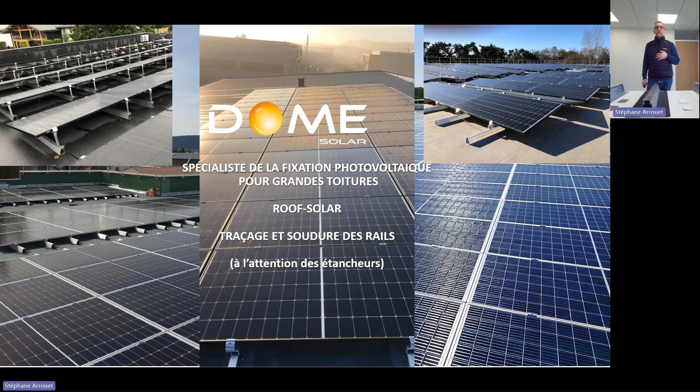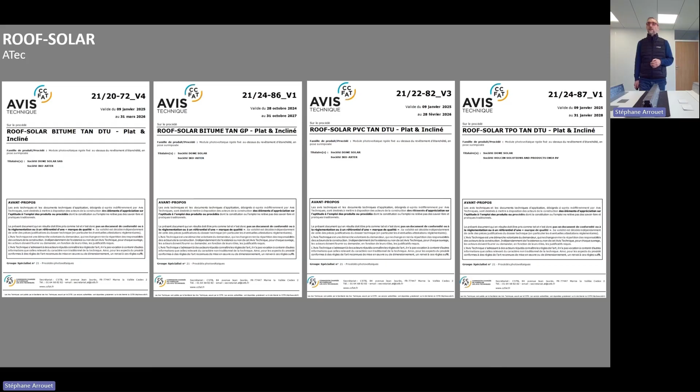Feel free to visit our website to download the technical reports. You may already notice that we are on V4, so version 4 of the roof solar bitumen, and PVC V3. This is with our partner IKO Axter. With our partner Holcim, formerly Firestone, we are at V1. Also on our website, you will find the installation manuals. These two are regularly updated.

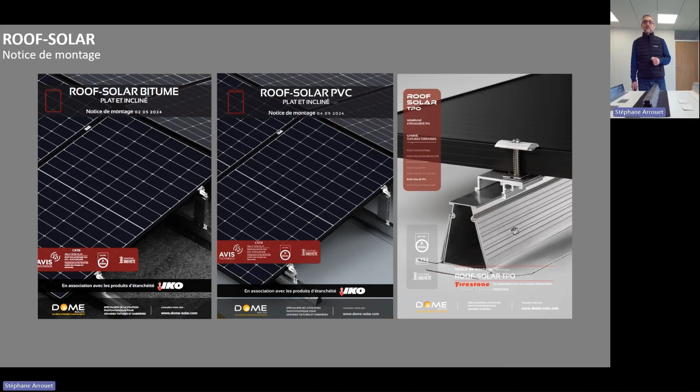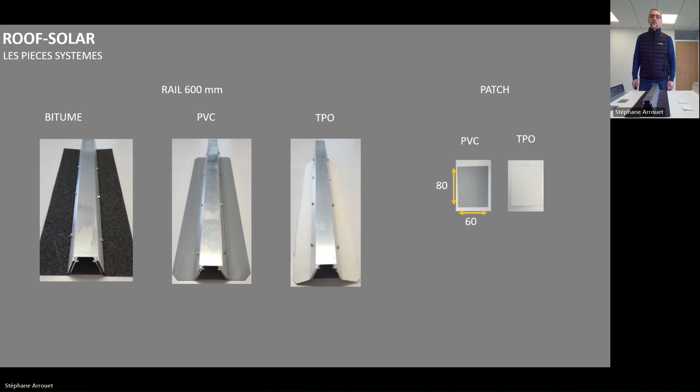Before we delve into the important aspects of layout and the crucial process of welding, I will first introduce and explain the specific parts that are of particular concern to you, especially in terms of ensuring optimal waterproofing, which primarily involves the critical welds themselves.

It doesn't matter. In the waterproofing system, you will always find the 60-centimeter rail here fitted with these TPO membranes, fitted with its roof solar bitumen membrane with flakes. And here the 60-centimeter rail fitted with PVC membranes.

And please do not forget that with both PVC and TPO roofing systems, we specifically provide you with durable PVC patches and robust TPO patches. These essential patches should always be carefully placed at the very ends of the rails to effectively prevent any potential puncturing or damage that could occur between the roofing membrane and the underlying rail structure.

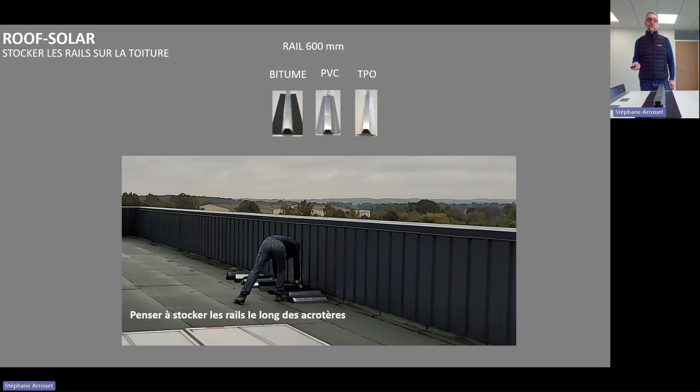Before you start marking out, you'll have a bit of handling to do, meaning you'll need to store the rails on the flat roof. What I recommend is to place them along the parapet walls, because there is an area where it is forbidden to install our rails. That's all around the parapets and within a distance of 1 meter from the parapet. You'll also find these same distance requirements around the skylight.

Dome Solar provides you with a plan featuring cumulative measurements, meaning there is a 0 point at certain locations and a measurement at each end of the rail.

In general, for marking out, I ask to have 4 people. And the following tools: a 50 or 20 meter tape measure, which you'll primarily use to accurately measure your roof, so it could be from one gutter to another, it could be between the ridge cap and the edge of the gutter. You might check your measurements in relation to the skylight, to the smoke vents. Also, what's even better is a chalk line with red ochre, as it allows the markings to remain visible from one day to the next. You never know, at night the humidity could erase it if you use blue chalk line.

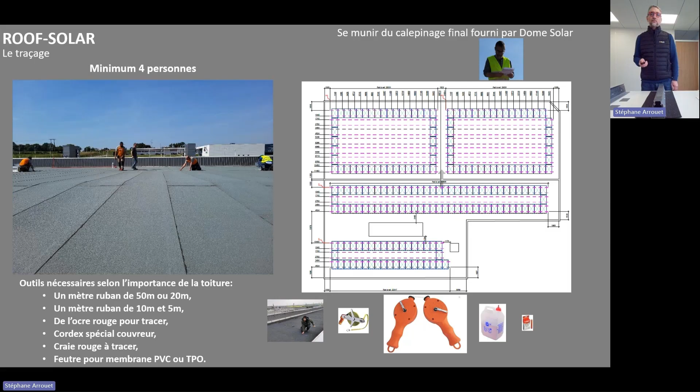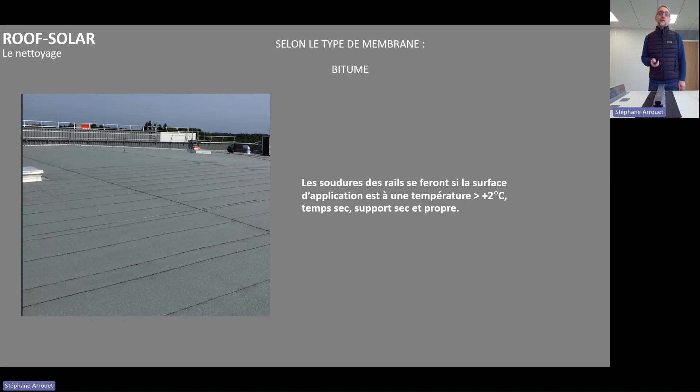Make absolutely certain that you have chalk or a suitable pastel to write clearly on the bitumen surface, specifically a vibrant red pastel, or alternatively specialized markers designed for use on PVC and TPO materials. Of course, whether for marking or welding, the membrane needs to be clean. So for applying bitumen, you absolutely need an outdoor temperature that is above 2 degrees Celsius, along with completely dry weather conditions and a thoroughly clean surface area.

For PVC, it can happen that it's soaked PVC or TPO, and of course you'll need to remove any excess water. You might even need to clean it thoroughly with plenty of water. And then if that's still not enough, you'll have to apply a product, IKO Armourplan, at the locations of the welds and rails.

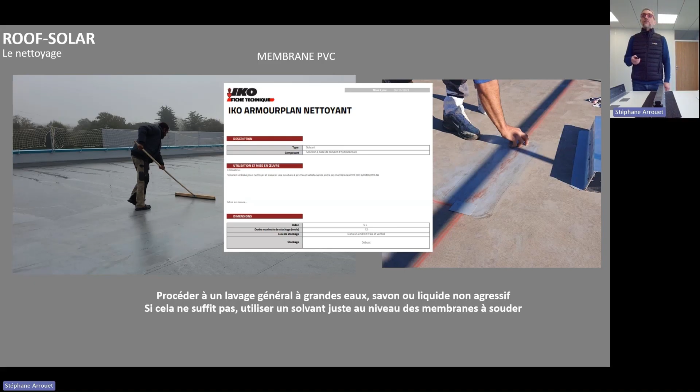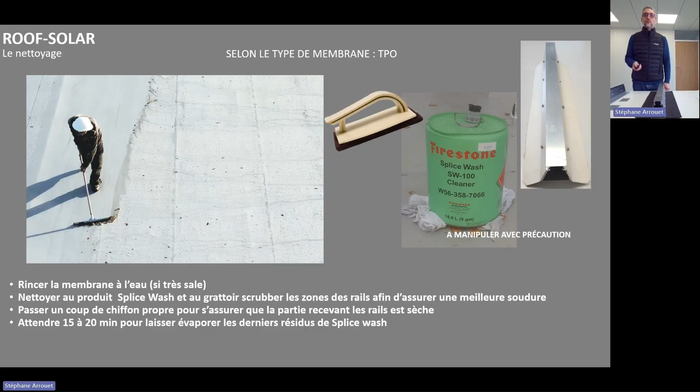You'll also find cleaning is necessary on the TPO membrane. And on the TPO membrane, in practice, you are required to apply a product, Firestone's Splice Wash, at the location of the rails. So same thing, when you apply the product, you have to wait for it to dry before welding.

As I mentioned at the beginning, there are measurements to check before starting. Why 4 people? Well, actually, it depends on the size of your project and the dimensions of your generator. But if you already have a distance of more than 15 meters from the first rail column to the last rail column, often just to hold your measuring tape, you need 2 people. For marking, you'll also need 2 people and 1 in the middle of the marking to keep your chalk line pressed against the ground. And 1 person will read the cumulative measurements and another will also mark on the ground.

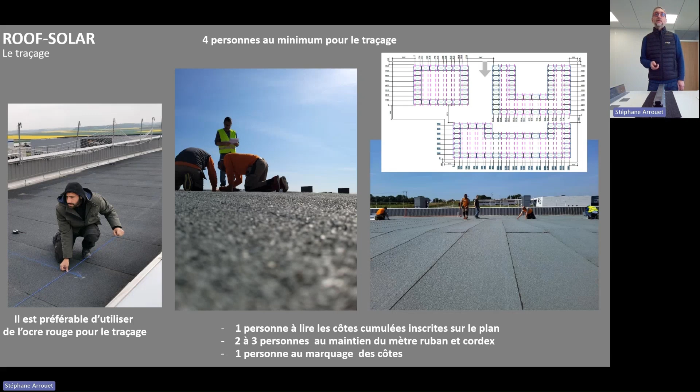The very first and most important thing to do is to carefully check the precise measurement in direct relation to the curb, ensuring accuracy, and you will mark your 0 point. There's a measurement that always comes up on our plans. It's the famous 1040 measurement. In fact, it's the 2 rails that are located under your module.

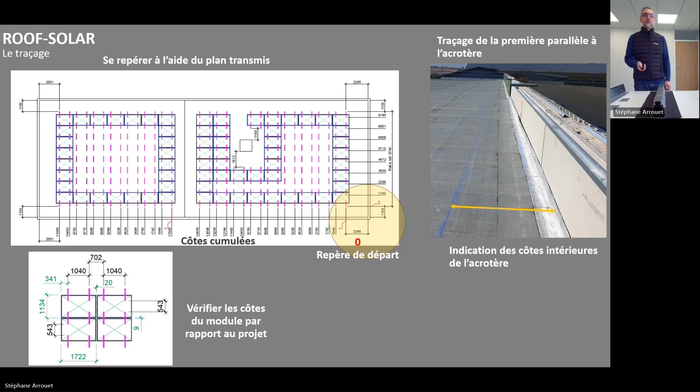These are measurements you need to check regularly when you're marking out. It's important to regularly check that both of your measurements are at 1040. Of course, the intermediate measurements between 2 1040 measurements, that is between 2 modules. But for you, the waterproofers, that's not your concern. Since you won't be handling the installation of the modules, there are still measurements to be respected, and these will change depending on the size of the module. So a measurement that comes up all the time on every plan is 1040.

We're going to draw a first parallel line on the longest side of the parapets. You should be at least 1 meter away from your parapet. Here, for example, we're about 1.13 meters away.

So you're going to take this first parallel, your 0 point, and we're going to go all the way around your generator, your area. And you stop right at the very last one, the final row of rails, meaning that you will have an outer measurement: the first one carefully marked in direct relation to the parapet, and the very last one, which is positioned inside your generator, providing a comprehensive and accurate measurement.

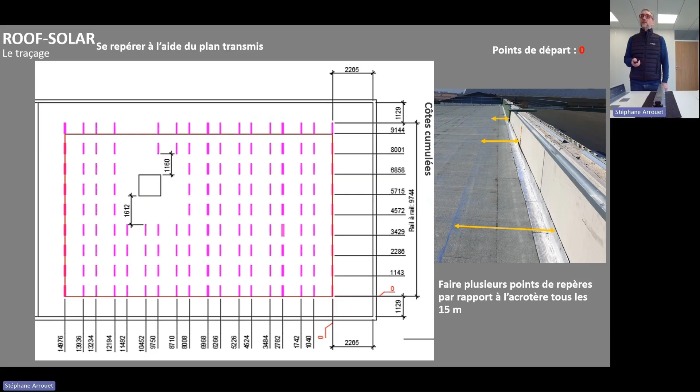So when you're marking with your chalk line, you need to take much larger measurements. Here is your generator. If we look at our measurement at 9.14 meters, that's the last line you drew. And you also have your rail, which is actually about 9.74 meters. Your generator is 9.74 meters. So don't hesitate when marking with the chalk line to go much further than the indicated measurements. It will help you when installing the rails.

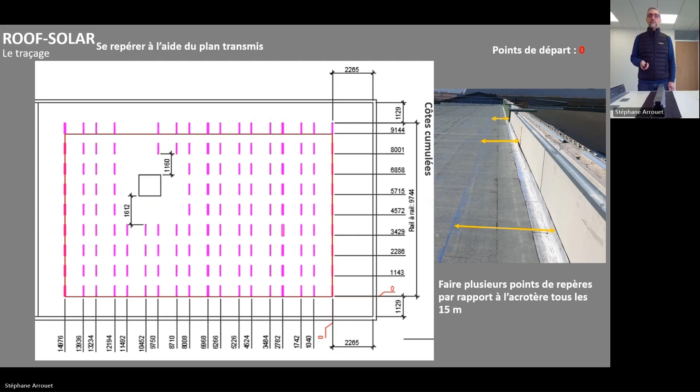So of course, when we start marking, we have a plan with the cumulative measurements, and on the roof, nothing has been marked yet. We start from our 0 point. And we draw our first parallel to the parapet.

And we're going to use the 3-4-5 method, which means a first measurement between 0 and your parallel at 3 meters, a distance of 3 meters, and a second measurement from your 0 point, but perpendicular to your first marking. You will draw an arc with a radius of 4 meters. Next, you will check your diagonal from your 3 meter marking and your 4 meter arc. At the intersection, you will have your 5 meters. And now you can draw your perpendicular to your first line.

You will do exactly the same on the opposite side, at 14.97 meters, a little further. You do between your 0 and your 14.97 meters, that's your last rail column. You mark your 3 meters in relation to your 14.97 meters. You draw your arc at 4 meters and your point at 14.97 meters. You check your diagonal between your 3-meter point and your 4-meter arc, and you draw your perpendicular.

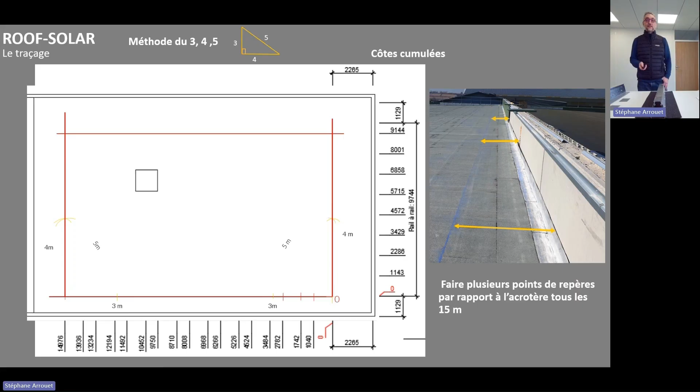That's when you have one person at the 0 point, another at 14.97 meters, one person marking according to the cumulative measurements, and another reading the cumulative measurements on the plan. Here, for marking the cumulative measurements, it's better to have 4 people. And you do the same thing on the opposite side, using the same cumulative distances.

Then, in the vertical direction, meaning along the rails, you just mark a point at one end of a rail. You don't mark both ends, just one end. And you do the exact same thing on the opposite side. Once you've marked everything, all that's left is to mark with the chalk line. For the chalk line, you can do it with 3 people: one at the 0 point, another at the end at 14 meters, always taking a bit longer, and one person in the middle.

We usually start vertically, so you'll have one person there. Make sure to take much more than 9.74 meters. Measure from rail to rail, from one rail end to the other, and don't hesitate to take a longer measurement. There's often someone in the middle who also presses down with the chalk line, stretches it, and above all, when you're marking, don't go beyond 15 meters. With the chalk line, just a little bit of wind is enough to throw you off course.

Once you've done the vertical direction, you do the perpendiculars, and again you need at least 3 people to mark the lines. Then once you've marked everything, you'll go back to the rails laid along the parapets. You'll need to bring them to each intersection of your markings: first column, second column, and so on.

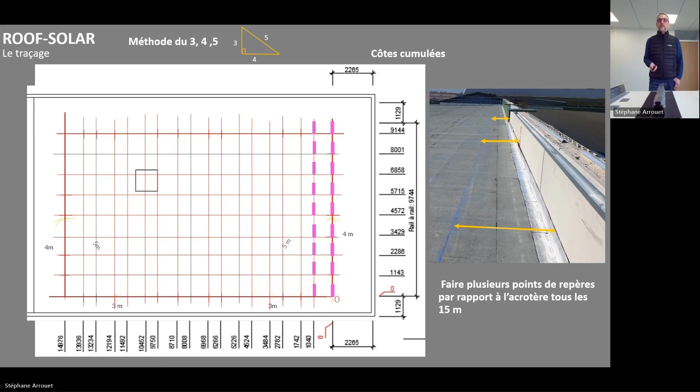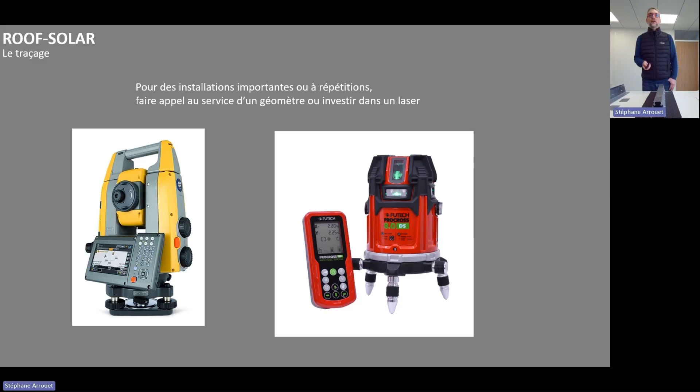For a project that's much larger than a 50 kilowatt or even a 100 kilowatt one, you might want to use a laser, or even call in a surveyor who will set out points. But even then, you'll still need to do the marking, though at least you'll have all the points set. And if you have a surveyor or a laser, it's doable by just one person.

Handling the rails in terms of time shouldn't be underestimated. For a 50 kilowatt job, you need at least half an hour, even with 3 people.

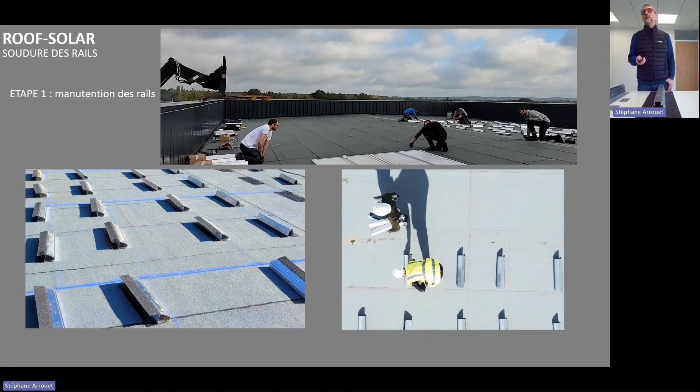In the photo here, you can see the marking, and once you move forward with the marking, what's interesting is that you can start welding. There's one team doing the marking and another team welding. There are 2 types of welding, PVC and TPO, and both are welded with hot air. You can also use a semi-automatic machine to help, or otherwise it's done manually.

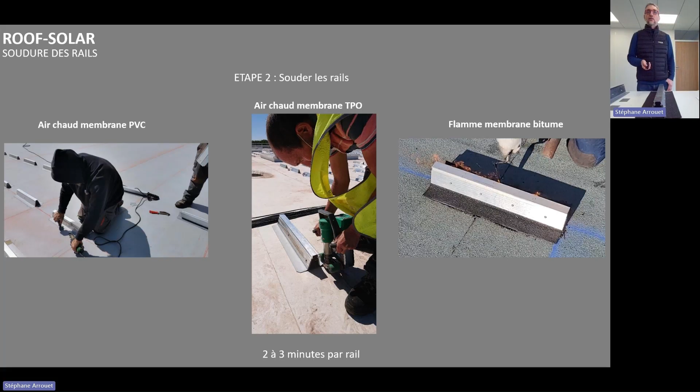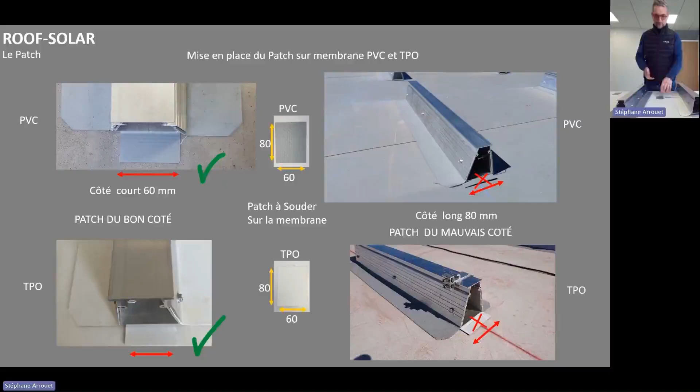60 by 80. If you look at the screen, there's a specific way to place the patch. In the direction of the 80, the patch measures 60 by 80.

When you weld your rail, you have the convenient option to carefully slide the patch into place after the welding process is complete. And always in the lengthwise direction of the 80, it must be centered in relation to the rail. It must not extend beyond the entire width of the rail, and above all, it is absolutely crucial that it must not encroach upon the delicate membranes that gently rest along the entire length of the rail. And of course, it should also be carefully placed on the opposing side as well.

You will need to carefully weld it securely to the membrane. Either you can put it in once you've successfully welded your rail and then securely weld it to the membrane, or since it's marked, you can just as easily place your rail and see where it lands. You can carefully place your second patch right here, and then securely weld them together before proceeding with the installation of your rails.

If we meticulously examine it from this particular perspective, you will observe a noticeable overhang both here and also over here, which should always be perfectly aligned with the rail itself. And you can do half and half. This is specifically designed to prevent the rail from puncturing the delicate membrane.

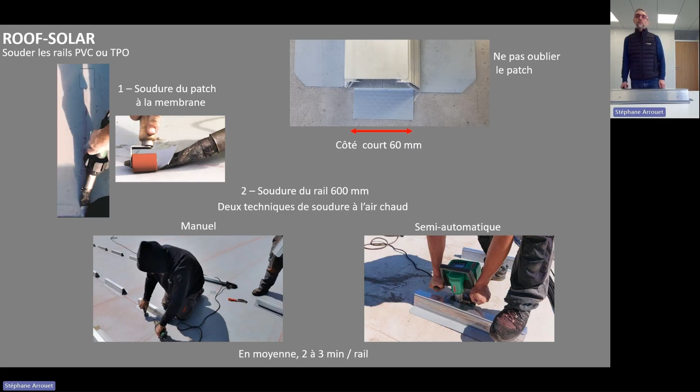As I was previously telling you, whether working on PVC or TPO materials, and utilizing either manual or semi-automatic welding techniques, it typically takes on average between 2 and 3 full minutes per rail, which comprehensively includes the application of the patch.

The asphalt. Once you have traced on your bitumen membrane and placed your rails at the crossing points of your straight lines, to weld your rails, you will have to trace around the retaining strips. So you can either use a cat's tongue trowel or a red chalk line to mark. And you do several rails. Then once you have marked all around the rail, all around your retaining strips, you blacken this area.

And you do this for all the areas you have marked. For example, you do 8 of them, and then you go back to the first blackened area. It needs to be cool before you lay your rail. And then you weld each membrane that is securely joined to the main rail component onto the membrane, and you finish with the border all around.

And on average, just like with PVC, it takes you 3 minutes. Once you have finished welding, the waterproofers have completed their work.

And then it's on to the electricians, the module installers. And for that, there's another video that I encourage you to watch.